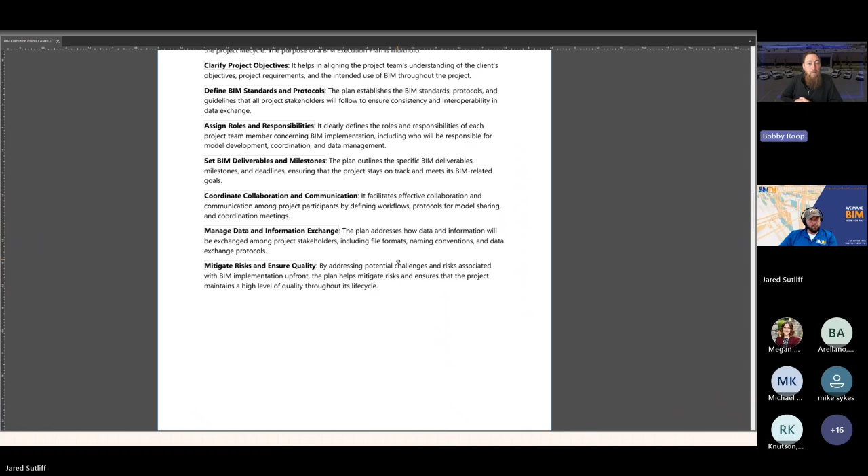So I think it's just thinking through that perspective - okay, this gets us in the ballpark from a budget perspective. But if you're really trying to button down and understand how many hours something's going to take, you really got to dive deeper.

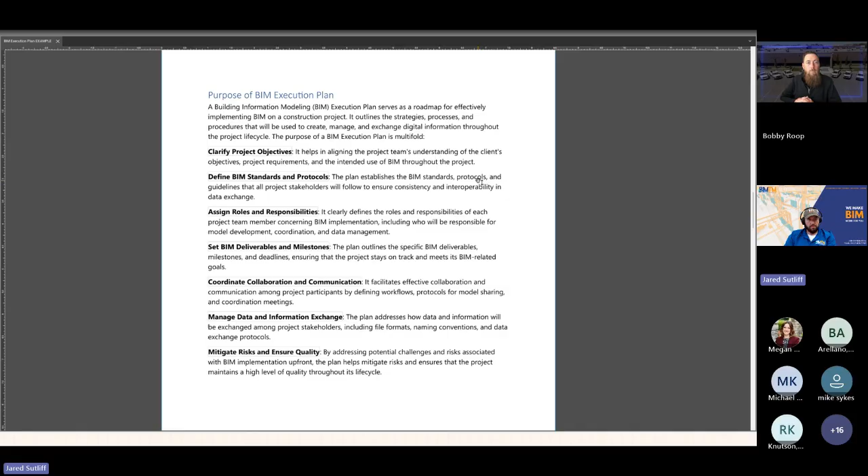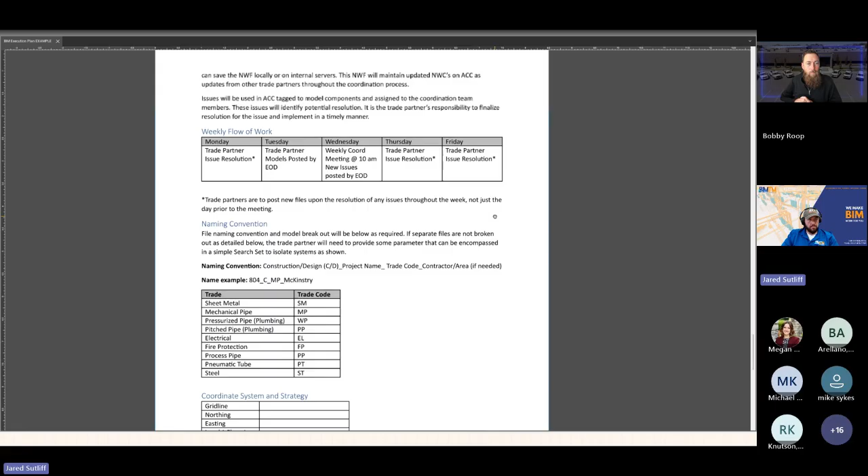One of the things I have up here as well is the BIM execution plan. It does talk about very specific aspects of the project deliverables, the level of development, roles and responsibilities, data exchange. If this is not a part of the process, you might miss a lot of important aspects of the actual hours it's going to take to successfully execute the estimate and the true hours it's going to take.

It'll usually talk about a weekly flow of work, the level of development, who's responsible for what, installation sequencing, and also the hierarchy - which one of the trades has a higher priority over another trade.

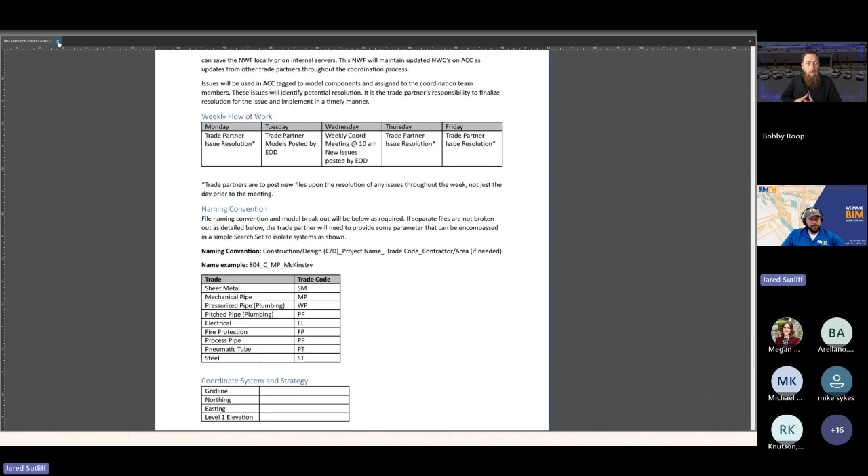And that's going to be a big important issue when it comes down to who's got to move for who else. Developing that rapport is going to be great for - hey, I need you to move here, but then in another location, you can move for me.

So there's a lot of benefits from having the right kind of support partner who's been in the trenches and who can provide the insight and experience of many years of being on crappy jobs with really crappy outcomes. Nobody likes it, but we've all been a part of it, we've all dealt with it. Those lessons learned, we can definitely use those to our advantage going forward.

I'd like to add something too - nobody defines the actual deliverable. There's a couple components because I remember back in the early days, the idea and concept of BIM was building information modeling, right? And the big one being the I, the information that you can extract from the model.

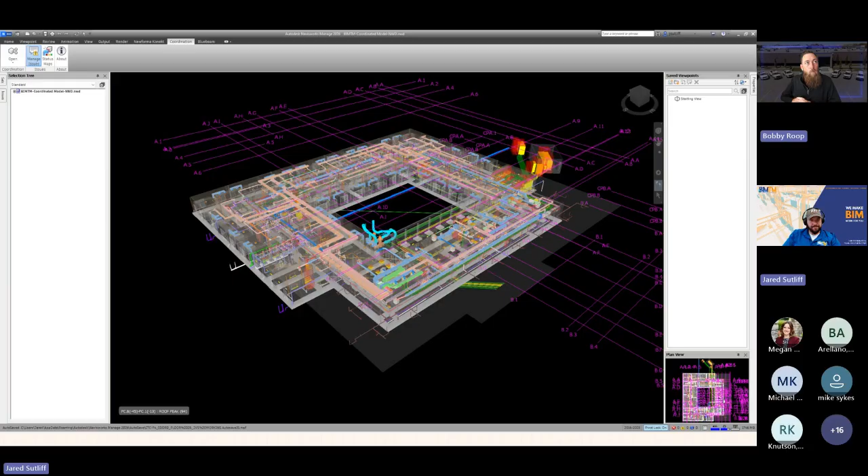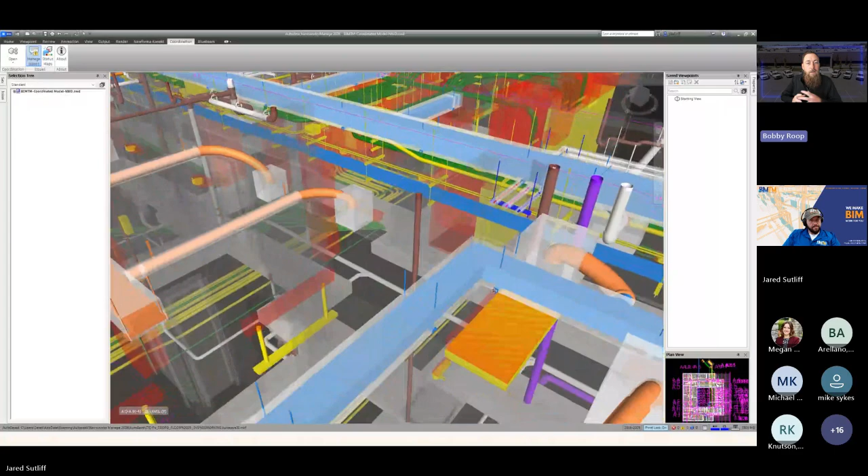What was sold to the owner or the client back then - this is dating it a bit - was the idea of your maintenance guy being able to jump into a model, or your facilities department jumping into a model and being able to understand how all the systems are connected, or even a light fixture. This light fixture, this is where it dates me a bit, is 4T8 lamps, and this is the color temperature of the lamps. So if that lamp is burned out, we know how to replace it.

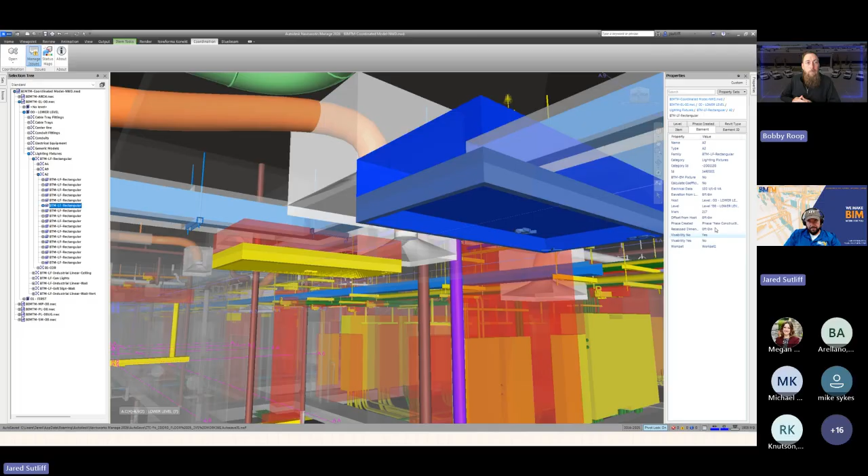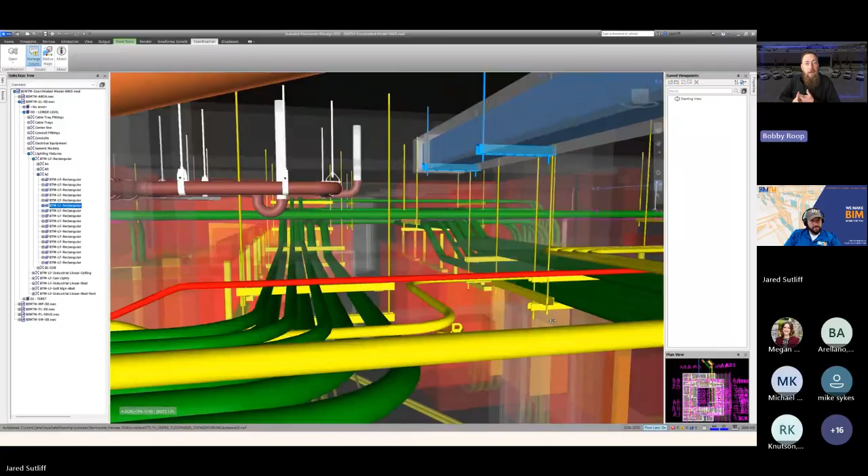I think what we're missing a lot still is it dives deeper into what is the as-built requirement. There's a disconnect still right now where we get through modeling and coordinating, and it's kind of dumb information in a way, like we use it for construction. Then there's an as-built component that's supposed to go back to the engineer, but what is that? Is the engineer updating their model to a true as-built condition with all that information built into it? I think that's a big open item.

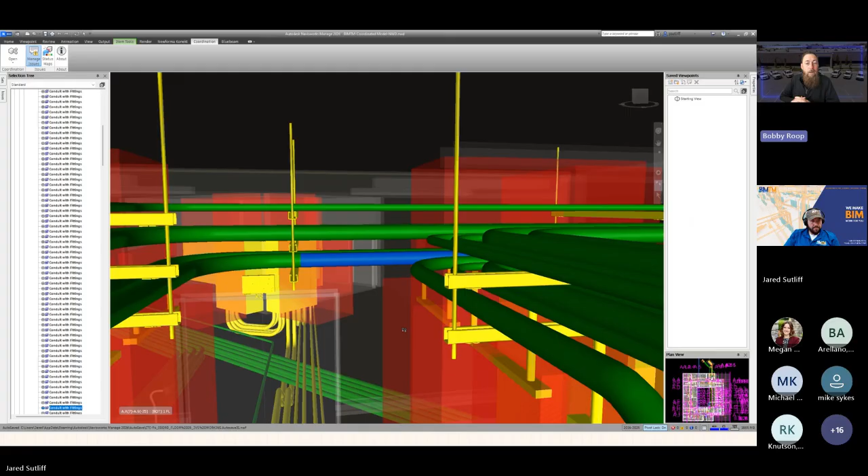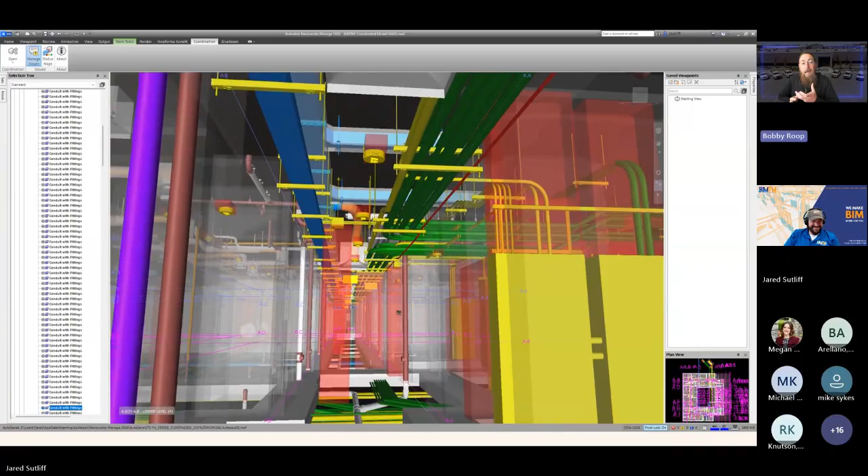The as-built requirement is huge because it's easy to understand all the upfront stuff, or maybe not, but a lot of people forget about the as-built requirement. I've had to go through and completely as-built projects, meaning walking on site, taking photos of conduit routing, and coming back and modeling the true as-built conditions of branch conduits. So those hours are typically not accounted for.

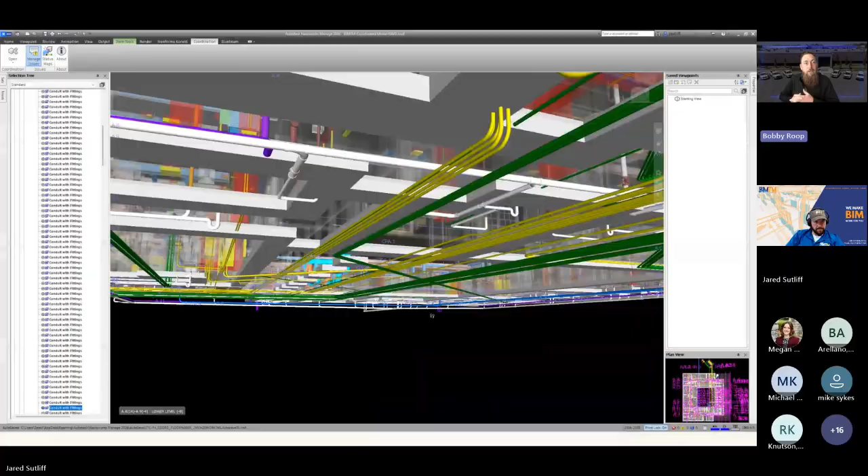So for the electrical contractor to think about, how do you build that into your budget where you have a decent amount of potential hours? Ideally, the as-built is the model, right? That's what everybody goes into it thinking - there shouldn't be any changes because this is all coordinated. But I can promise you there's going to be as-built conditions, field coordinated issues that are never caught up in the modeling process or on drawings. So as-builts are huge.

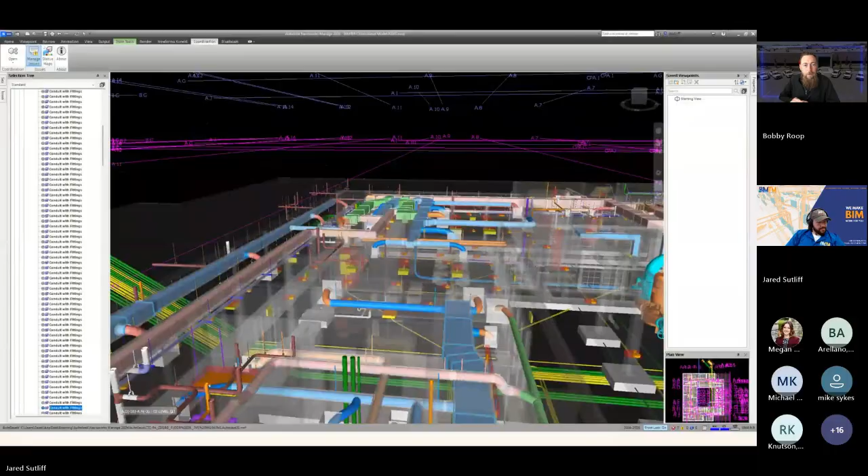I like this model that you're flying through. Oh, thank you. Yeah, it was a sample model we put together. I believe we have it on our website as well, just to explore.

I guess the last thing is how do we make sure, or at least get those conversations started, so the office team, the BIM team, the field staff, the prefab shop are all aligned on the expectations and outcomes we're looking for through this process. Because if we're all stuck in silos, it's not going to be a great project.

It's going to be just like any other issue we've had in a various set of projects where estimating or the PM doesn't want to dedicate the hours, or the field team gets the drawings and says, oh yeah, those look good, and then come to find out they didn't use it, or they got the prefab and threw it in the garbage and just built it how they wanted to build it anyways.

So to that point, having those conversations, we talk about early involvement, and the same goes with the field staff. I've been in this industry for 17, 18 years. I've never done installation, I'm not an apprentice, I haven't actually been a part of it.

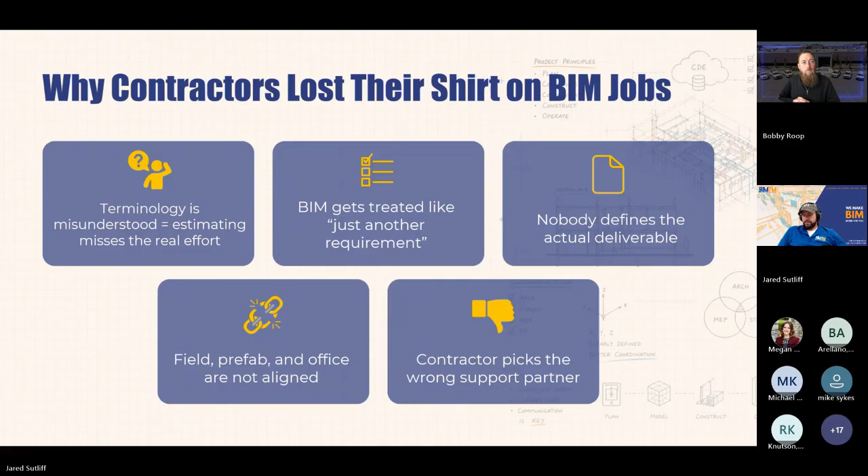Yeah, it's really easy to get caught up in silos. So again, I highly encourage anybody listening, anybody new to this or trying to get better at it, that communication between the field and the BIM group, whoever's doing your modeling, and the project management is huge.

So I can get in, even like your drawing that you have on the screen there, we do have a stair there. I'm trying to think, like, I might say, okay, I'm living in this 3D model, it makes a lot of sense for me to come up and over and bend it this way and go that way, or put the pull box there in front of the stair. It makes a lot of sense.

It's clean, it's accessible. And then the field gets involved, and they're standing out there on the job site like, why did he put this here? And they want to move it, or they think it was stupid. So I mean, that's a little example, but when it comes to routing and things like that, it's really important to get buy-off from the field.

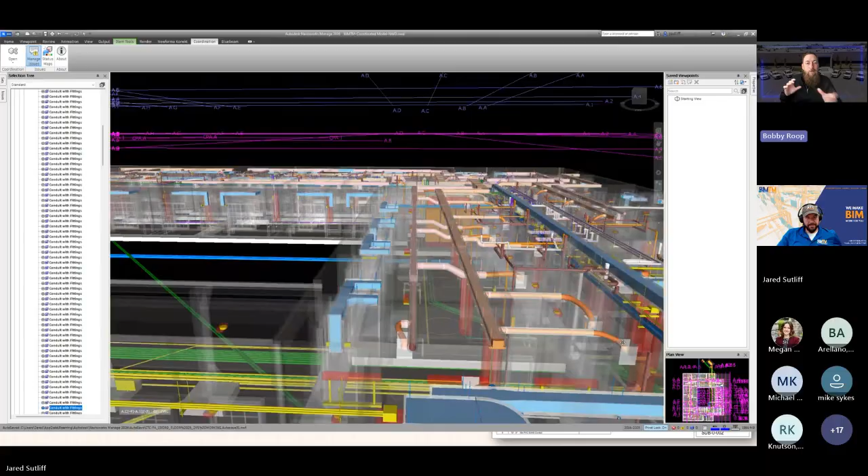Because again, there is some animosity between what we're doing on this side and the field a bit, and we need to bridge that gap and make sure we're all on the same page. The best way to do that is getting them involved earlier too, getting them signing off and approving things earlier, then it says, hey, look, we're all on the same page here.

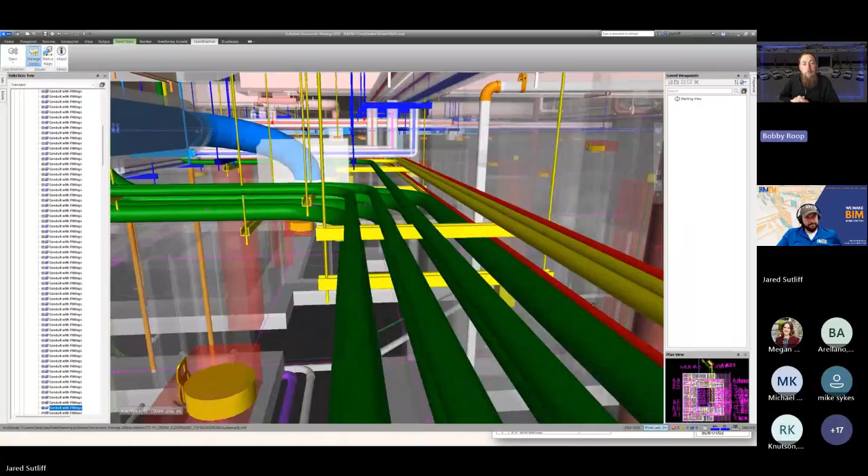We agree with it. The last thing we want to do is go through this effort, and like you mentioned, the field be out there asking and wondering why we did something, and then deciding to do something different. What I try to tell them is, if it's wrong or uninstallable, then bring up the issue. If you find a better way, or think there's a better way, but what I've done isn't wrong, then I appreciate your input.

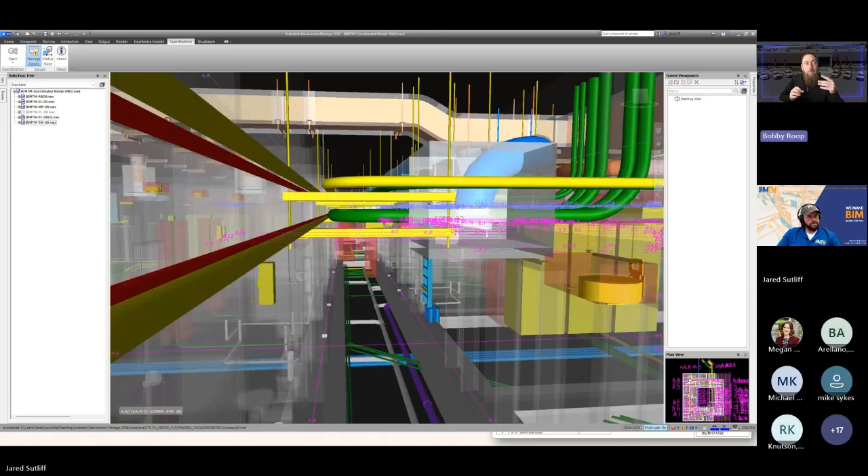We'll take it moving forward. But I've already done all the thinking up front, spent a lot of time designing it, coordinating it, modeling, detailing. Please just run with what I have. Don't try to spend more time thinking about it or re-engineering the system. Again, that's hours and time that isn't in the estimate.

We really have one shot to get this done right, and we can't have the field second guessing or redesigning things, because again, now we're just burning more hours.

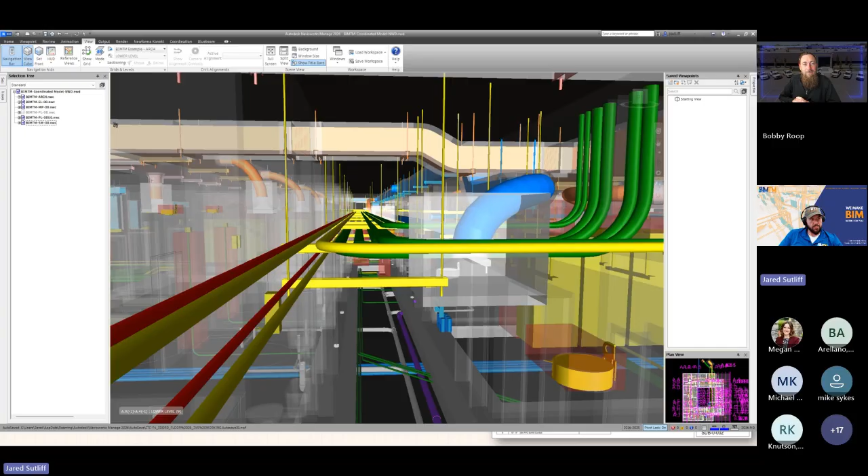And one of the things as well is they're out on site, and overhead plumbing hasn't been installed yet, so we're seeing this wide open area. They think, well, this is stupid, why are we so low? Let's run high. But that's the reason, and because that hasn't been installed on site, it looks like it was done stupidly.

And that's where, why didn't they go high and tight with these conduits? I can get way up there or whatever, right? And they're not seeing the big picture.

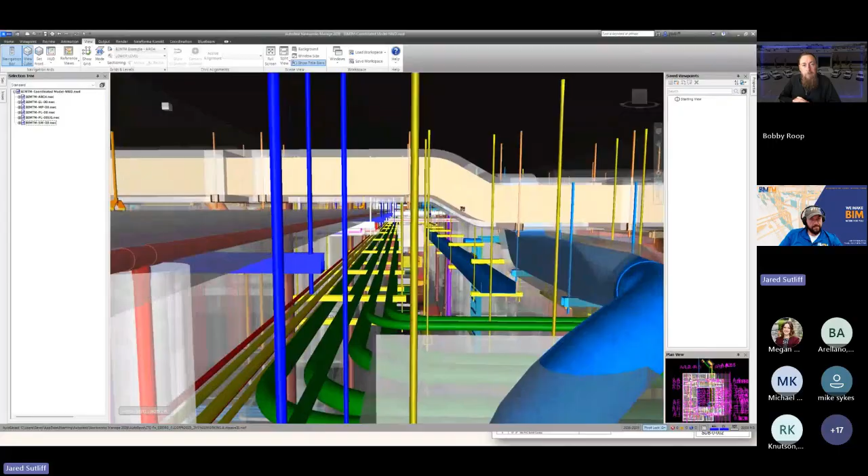So a big point there too is get your guys in the field access to the model. They should be, in my opinion, reviewing drawings, construction drawings, and then at the same time getting their head wrapped around the virtual model as well.

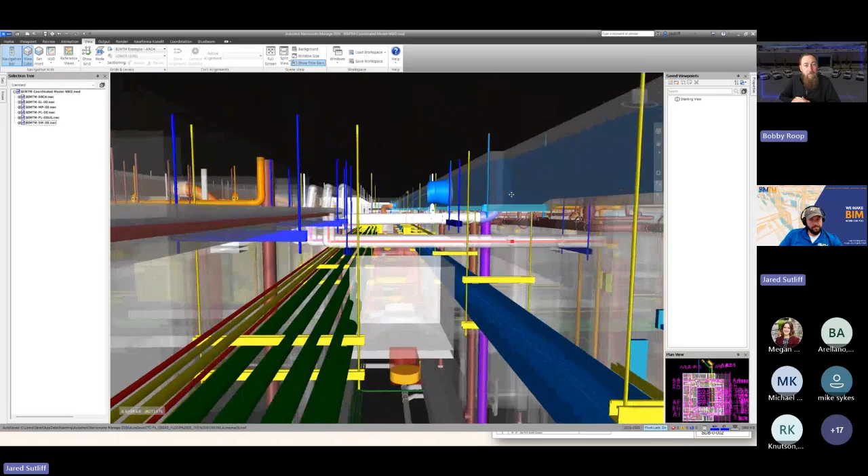Before they even start the day, before they start their tasks, they need to understand why. That's what ends up painting the rest of the picture. If they don't have access to the model, or aren't flying it or viewing it every day, they're going to be lost.

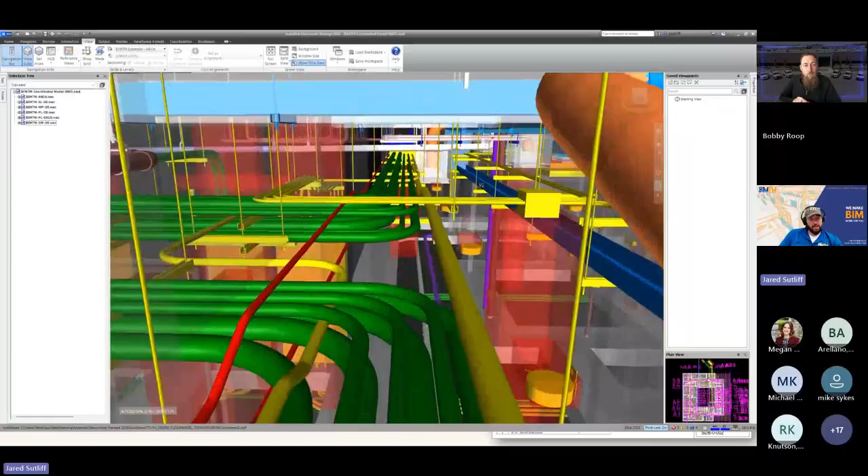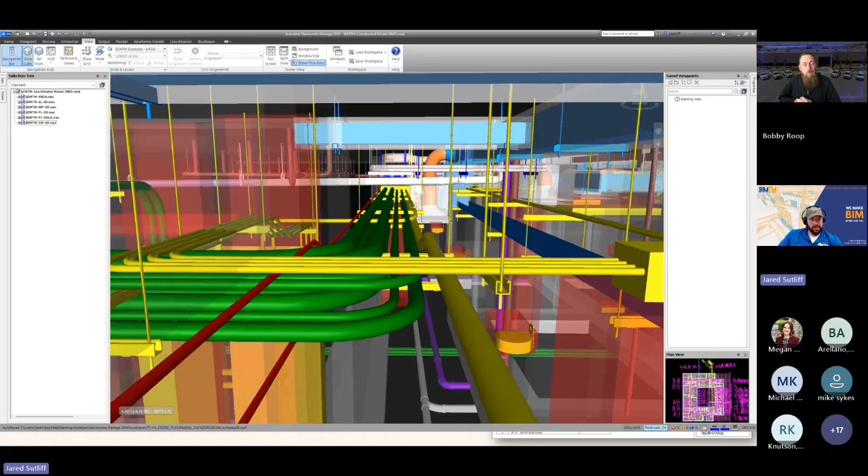To that point, some of the field staff understand installation, they understand needing to be out there with a tape measure, all of that. So we need to be cognizant of the technology barriers that may exist and help them. Even if they're not comfortable running the model, let's go up to site together, I want to sit down with you.

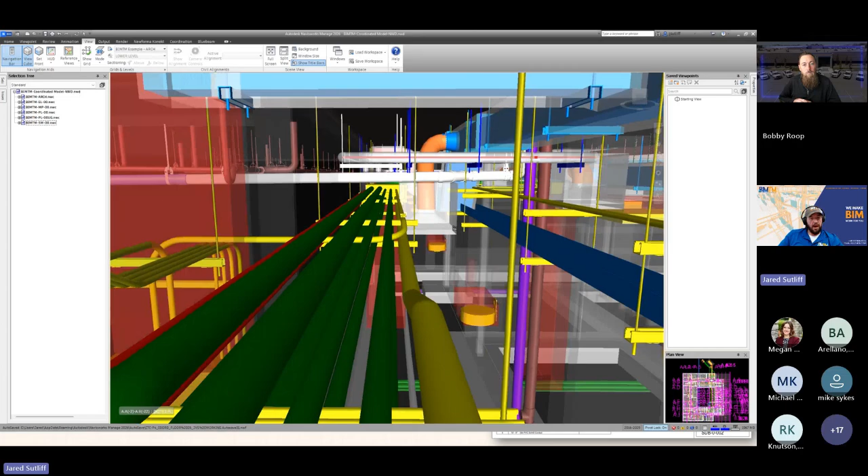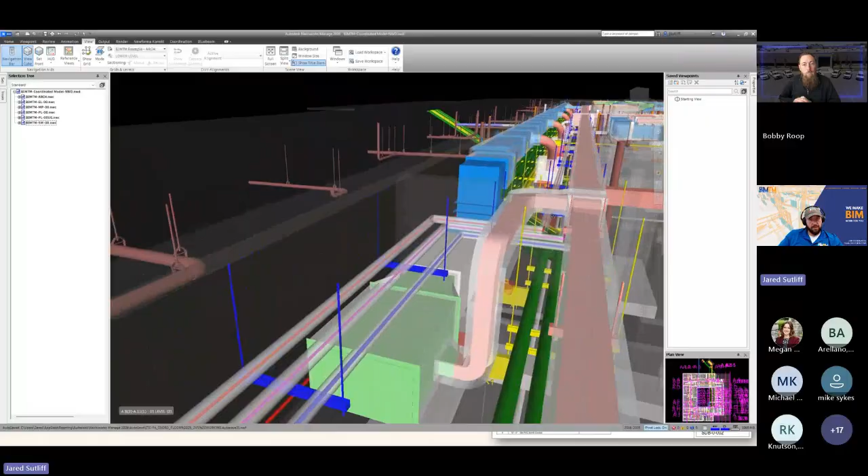Let's review this. You looking over my shoulder, or projecting on a screen, or even a screen share through Teams, like we're doing on this webinar. Let's look at this, let's review it. I've got issues and questions I've come across that you need to be aware of, and being able to show them the information, the why, but also address those issues and track them, so that when it comes to site installation, they know who they can rely on to get questions answered, while still letting them be in control and in charge of the project itself.

I know you guys offer training. Internally, about a month or so ago, I put on a training session for our entire company, maybe 20, 30, 40 people were in that, just to show them how to use Navisworks Freedom from a high level. That training session was recorded, and we have it saved in our library so they can jump back in and view it.

But it is huge. The electricians are electricians, they're good at bending pipe and pulling wire. As far as technology, some guys are good at it, some guys don't want anything to do with it. So it's finding those guys that are good at it, that are interested in the technology side, and getting them trained and taught up on how to fly the model.

It can be a little intimidating at times, but once you get into flying it, they're going to see how big of a benefit it is. And again, it goes back to that buy-in, getting the field to buy in. Once they start seeing the benefits of all of this, that's when your productivity really starts to boom. If they're apprehensive or pushing back, that alone is going to cause delays.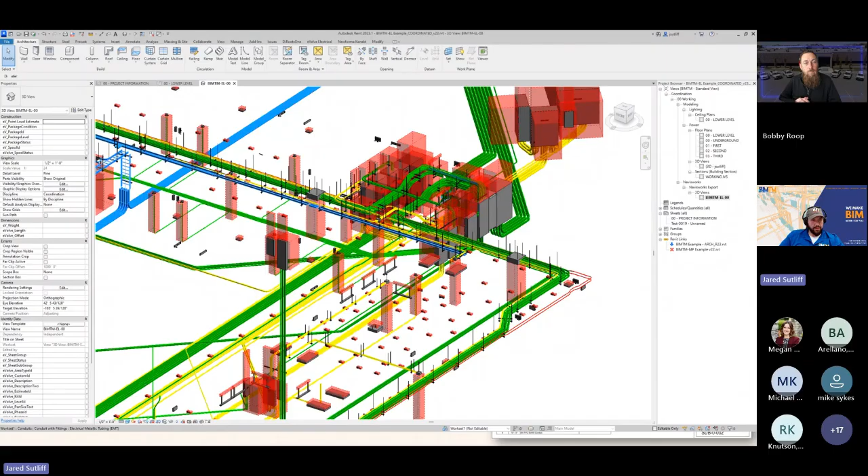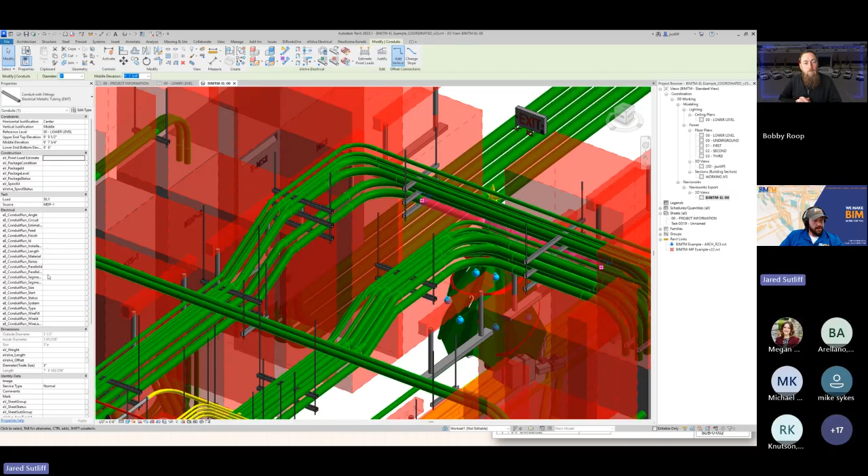To touch on a bit more, it's not just a model, it's not just a pretty picture. We can have data or information for the sake of the acronym - we can get trade size, material type, the to-and-from or source load information, bottom of conduit elevation, service type, and even when we get into branch circuitry, the nitty gritty of how many circuits.

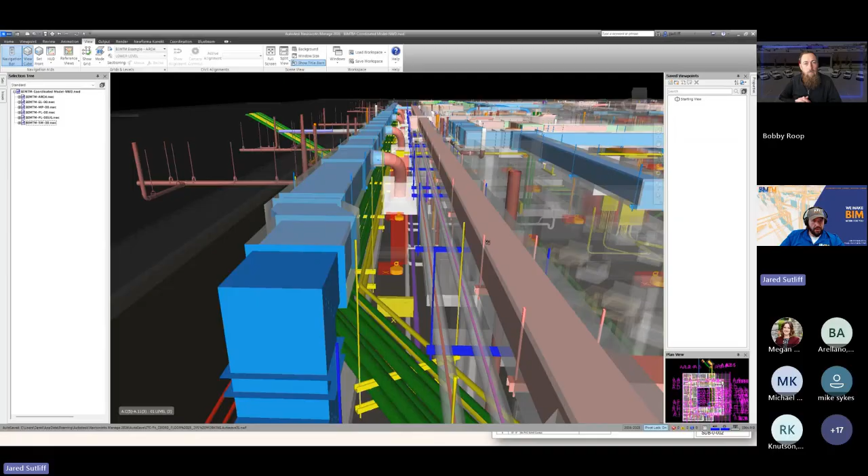So this information translates from the Revit model into the Navis model, and then we can extract that information into tags and put it on sheets and provide that to the installation team and or the prefab, so they can put those tags on the conduit itself. So we've got here's our load, we've got these circuits from the LP1 panel.

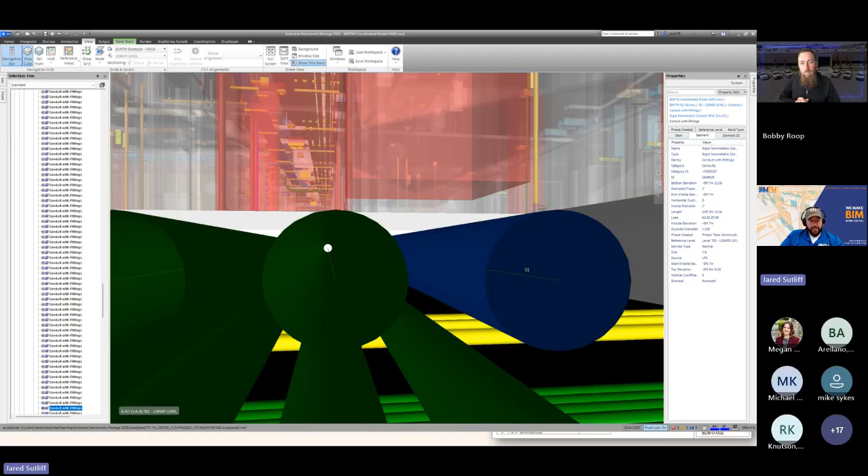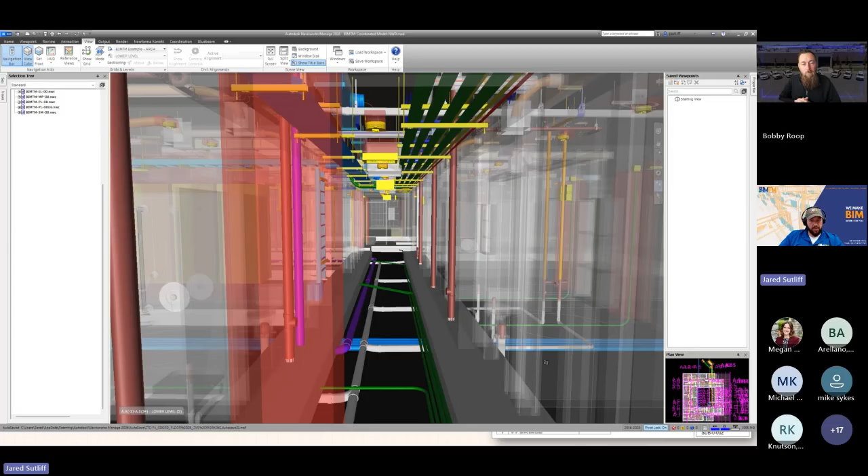All of that information is great, and the other thing is it can also be garbage too. So garbage in, garbage out, how that translates - it is a lot of effort to make all of this happen, but when it's done correctly and properly, we can really make some intelligent headway and assist the field and assist the prefab.

We can identify installation issues and help them understand why it looks a certain way with the current state of the site, and how we can assist with the impacts that it can have. So hopefully it doesn't actually negatively affect the schedule, and theoretically we can keep it on task and on track here.

A couple of BIM terms specific. We talked about the BIM execution plan. That is where the general contractor will call out specific requirements for the project for the BIM model or information, even getting into some facility management types of things if that is an owner requirement. Level of development or level of detail.

Our next slide, I believe, has the really awesome graphics, so we'll talk more about that. What's the difference between coordination and clash detection? What is model handoff or final deliverable for the BIM efforts, and then also the as-built model versus a coordination model. All of those will be spelled out in the specifications or BIM execution plan.

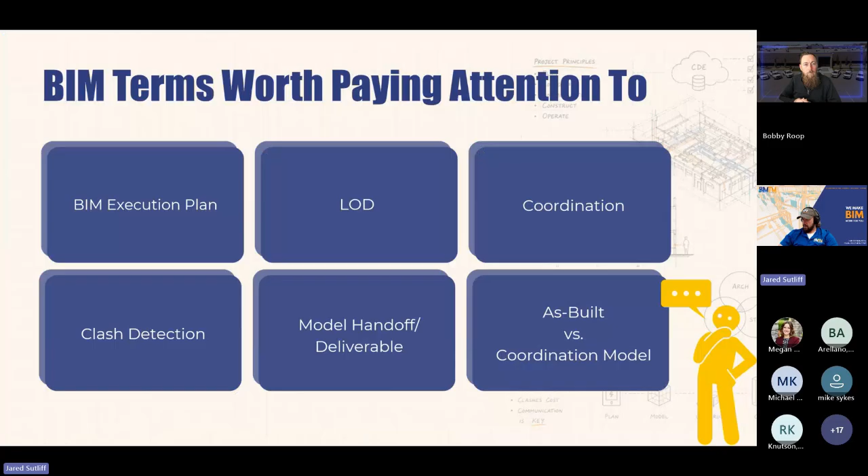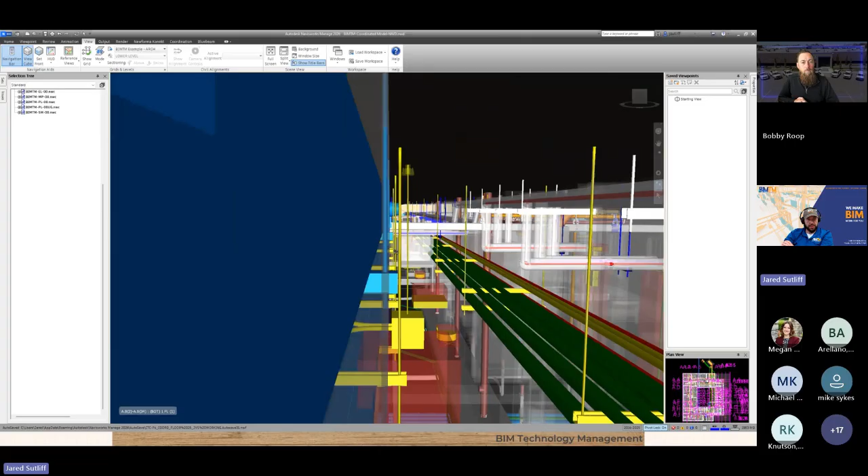Oftentimes the engineer model will be somewhere between LOD 200 and 300. Then when the subcontractor gets to it, it's going to be focusing on constructability and coordination between all trades. Hopefully everybody's on the same page with that. This also gets into putting in hangers and rack systems, so we can make sure we can actually get to the structure above without clashing with other trades and systems.

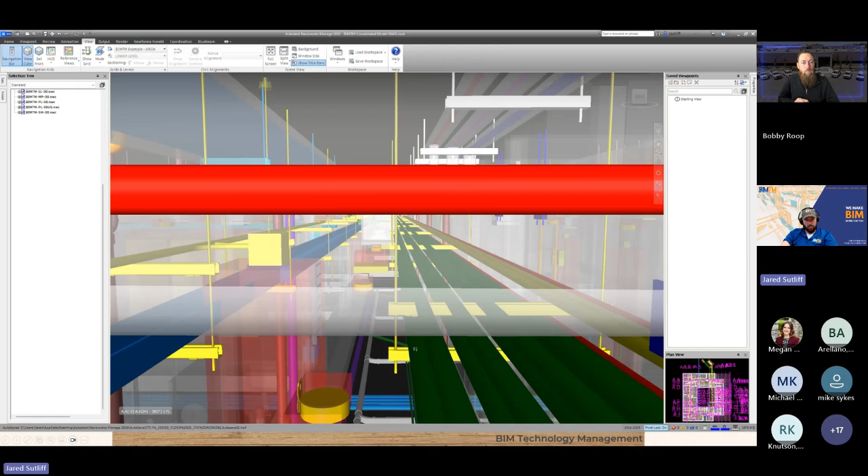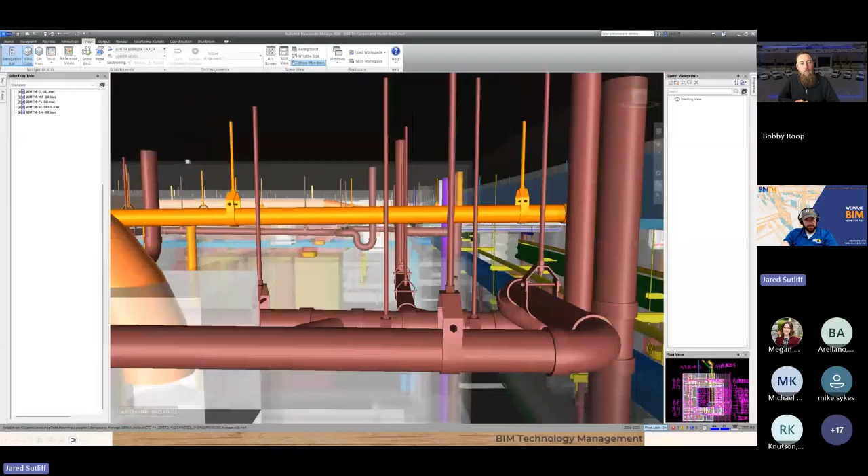When we get into LOD 400, this model isn't set up for it, but it'll actually start getting into the actual nuts and bolts of the systems. Depending on the project requirement, we may have square washers, lock nuts, regular nuts, strut straps, etc., within that. Same with some of the bracketry and supports for the MP side and FP side of things. Plumbing-wise, we've got clevis hangers and those kind of things.

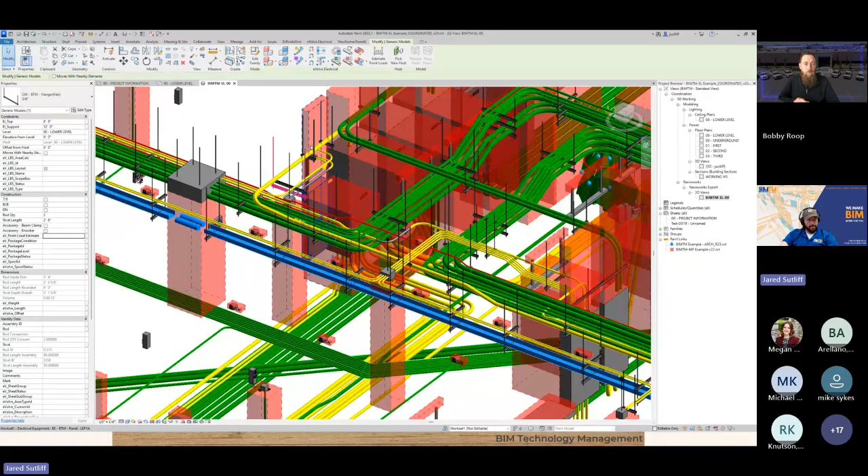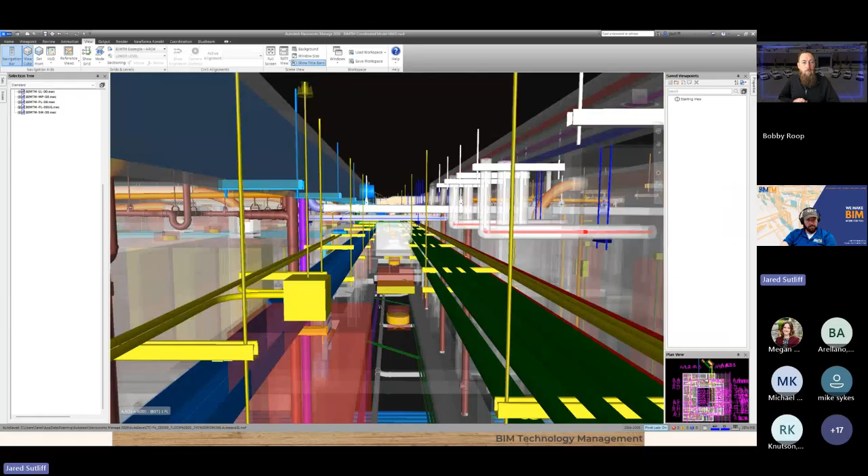The other value we can derive out of this is, because we have these locations in the model itself, we can also provide robotic total station points or layout points digitally, and that helps streamline layout. Since we've spent the time and effort, I know in my floor plan I can give exact placement of each of these rods, so we can put cast-in-place embeds in the deck before concrete's poured. They're identified via color, and when it's time to install in the field, they can just thread the rod up and in. You don't have somebody on a scissor lift jackhammering into concrete, which also reduces potential safety hazards and streamlines a lot of aspects.

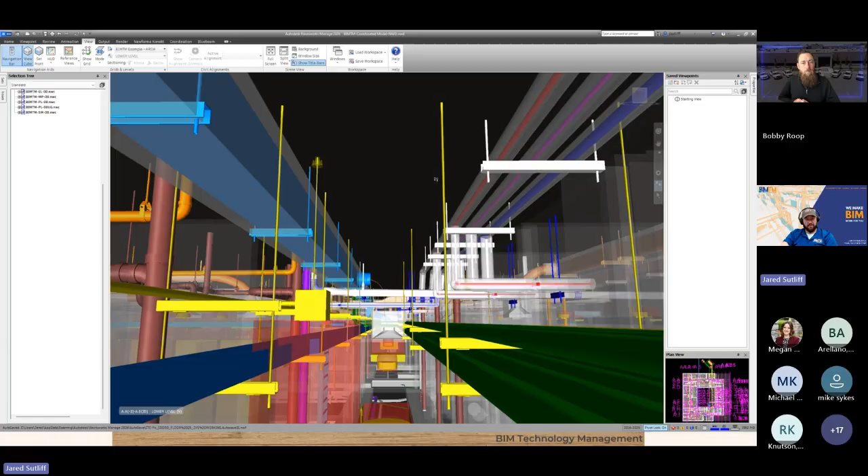So doing BIM just as a requirement, well, we can actually get a lot more out of it than just fulfilling that project requirement itself.

Yeah, it's good stuff. And you're spot on, again, back to the engineer side of things, there's somewhere between that 200 and 300 — some are better than others. And then typically we land somewhere between 350 and 400 on the construction side.

For us at Slifco, we're moving closer to 400 with getting into spooling. When you think of mechanical, their piping, even their HVAC, they've been doing spooling for a while. They're always a little bit ahead of us, right? They've been doing coordination longer than us, and they've been doing spooling longer than us. But when you get into spooling, we've got a couple example drawings there.

That gets you into that 400, even closer to 500 sometimes, depending on how far into it you want to go. But again, it's just getting back to the beginning: what's the expectation, what's the output, what are you trying to get out of it — that's so important up front, because it directs the direction of how you want to proceed in modeling. If you have an expectation that you want to do this, but you don't convey that up front, well then there's different modeling approaches you might take.

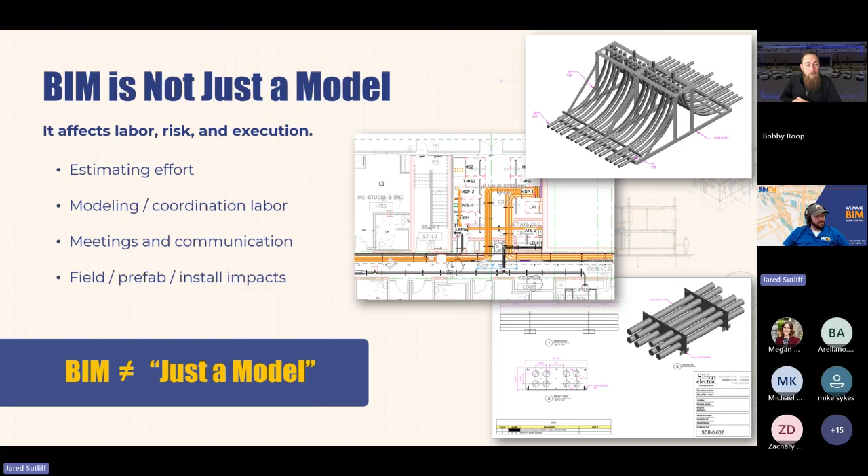All right, so if we could go back to LOD — one point I want to make is this is a standard LOD description, but different, I say it quite frequently: you really need to dive into the BIM execution plan, because some people have different understanding of what LOD 350 means or what LOD 400 is.

So when I hear people throw out, hey, they're expecting LOD 400 on this job, I'm always asking, what does that mean? Because every job is different, every client's different, the owners have different understanding. This is a really good general idea of what it looks like, but every project's different. So I'd really go back to the BIM execution plan and have them define what does LOD 350 mean, what does LOD 400 mean?

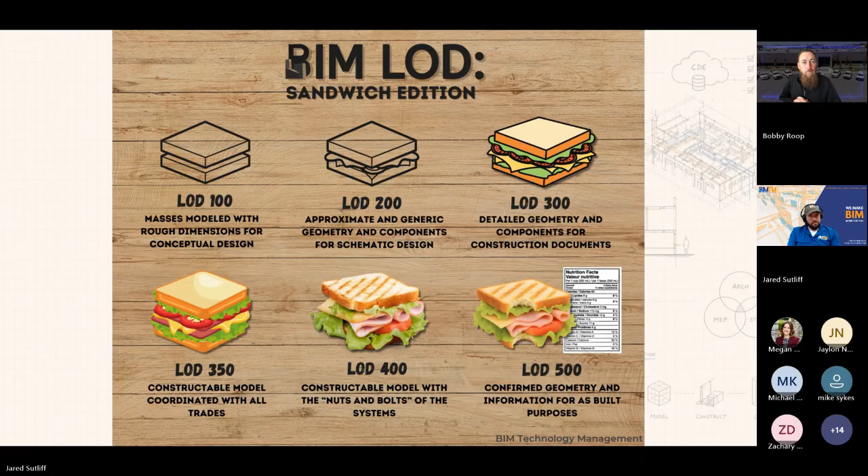Now we can get into your red flags. I love this shirt, I can't wait to actually wear it. But we've got those bullet points.

One thing we really haven't talked much about is the schedule - realistic timelines for coordination, model population, clash detection. Oftentimes they'll compress it, and it'll be like 2 weeks per floor, and then construction starts a week after. Well, okay, we've got 15 RFIs that haven't been answered yet involving equipment sizes and locations, or VAVs, or sizes of ductwork, because we're not getting the right airflow in certain areas, and the construction timeline isn't slowing down.

And so now all of a sudden we've got the field teams installing off of the engineer drawings, and we're still coordinating those areas.

Or we've got parts of the building, say a clean room, that has a lot more requirements for operational functioning and critical systems. And then another part of the building we've got, say, an open air cafeteria area. Those two areas are very different in complexity. If we're treating all areas as needing every tiny little clash identified and fixed, we're going to waste our time in that open air cafeteria area and ignore the real issues from the complex area that can really benefit from the BIM process - clash detection, coordination, constructability review.

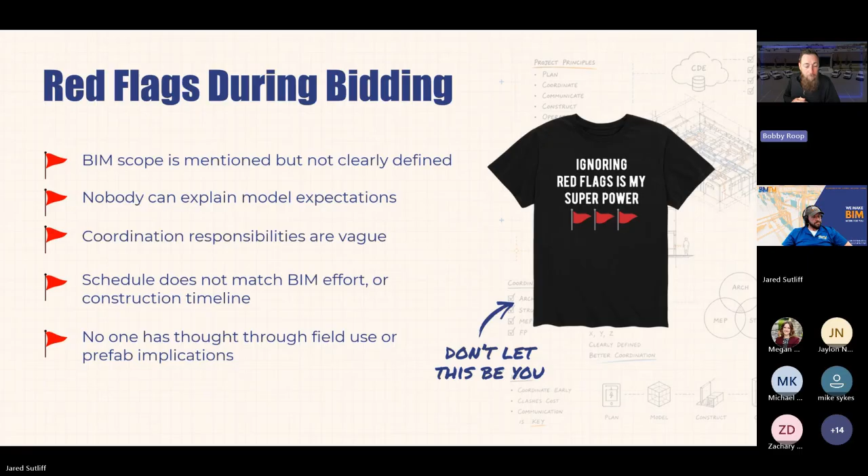Exactly, and so that's the schedule, man - it's crazy. It seems like this last year, at least in our world, on some projects we've been working on, they've been sacrificing BIM and the requirement for BIM just to push the schedule forward. So be mindful of that.

Again, the more pre-construction design talks and conversations you can have, the better you're going to be - to figure out what kind of cake you want at your wedding. Because the closer the wedding day gets and you don't have all those details ironed out, you're going to end up with a cupcake. And if there's grooms on this call, your wife or bride is going to be upset with you when the wedding day is here and she gets a little cupcake.

Right, yeah. Well, that has gone pretty quick. Getting through a couple of the other slides.

Spotting how to identify a good BIM partner. It's one of the things I did even in my prior life working at an electrical subcontractor - just asking a lot of questions, diving in, helping make sure you know your field experience, you've looked at the drawings. I'm going to look at them a completely different way, and my ignorance can sometimes be a benefit.

Asking questions about constructability, how to communicate effectively. If I think I'm talking about an orange, but you're hearing me talk about a grapefruit, well now we've got potential issues, scope gaps, and missing learning opportunities as well.

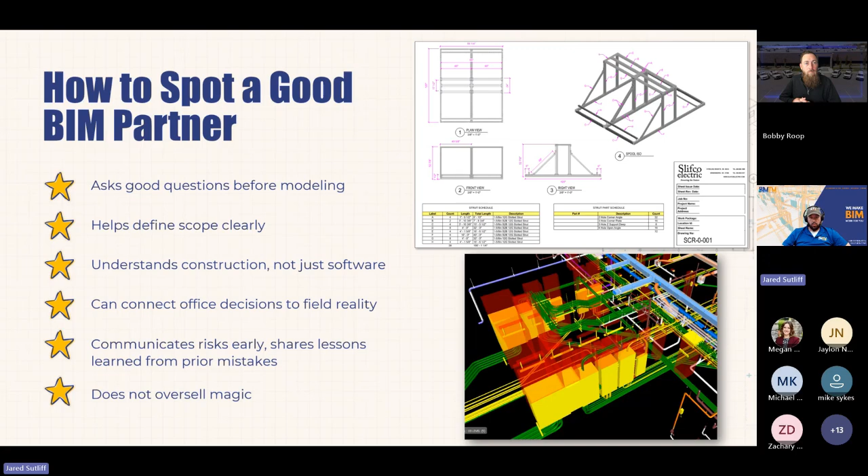Yeah, this is all good stuff. From our perspective, a lot of times we leverage your support, so having a team or partner that understands all of these things is super critical.

I've seen a lot of websites out there for BIM consultant services that sell this magic. They'll say we've got thousands of BIM experts, and I'm like, where are all these BIM experts at? Because there's not thousands of them. That's the reality of it.

You might know Revit and have learned it pretty well over the last year or two. But if you've only done one project, like a toilet room renovation, you're not an expert. True experts are the ones that have lived in this world for years or decades and have seen all the good, the bad, and the ugly. So that's another red flag. If you see somebody that says they've got hundreds of BIM experts available, red flag.

That goes back to, if you want a model that's just a pretty picture and you can't use it, sure, but that's not what we're here for. And if that's what you want out of the effort, I'm going to be honest and say we're missing the boat here, and there's a lot of other things that we can do and actually provide that value.

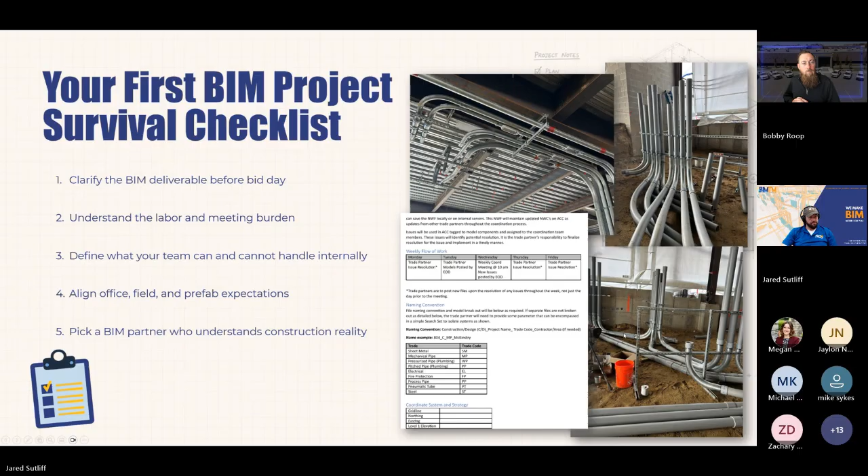So we're getting up against it here, and the biggest thing is don't go into your first BIM job blind. I'm not a cardiologist, so if I'm having issues with my heart, I'm going to go to the doctor. If my HVAC takes a crap, I'm going to call an HVAC specialist to make sure my furnace is running correctly. That's what we're here for. We know we're not the right fit for everybody, but all we can do is have a conversation and see if we can help you out and make something work.